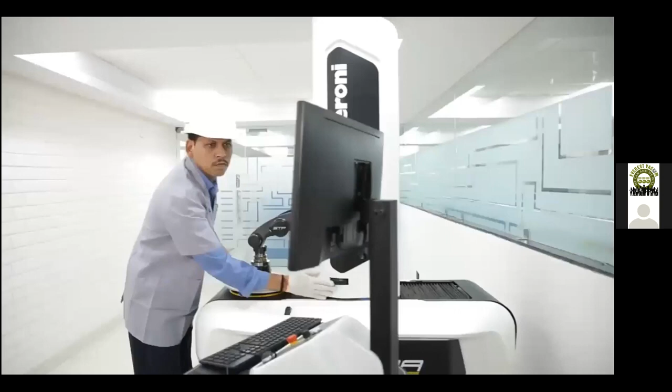We have a strong succession plan with highly competent second generation to carry on the mantle of Everest.

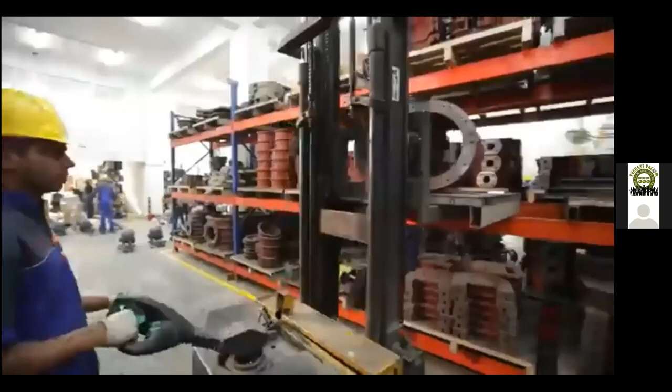In 1998, Everest Blowers Group went on to get its first ISO certification and also crossed international borders by exporting the products overseas. Over the years, Everest Blowers Group has made sure that it has abided by all industry norms.

Through various certifications, the Everest Blowers Group has been associated with many different industrial giants from different verticals, bagging prestigious orders from them. Innovative thinking and approach has made the company excel in many first-time achievements.

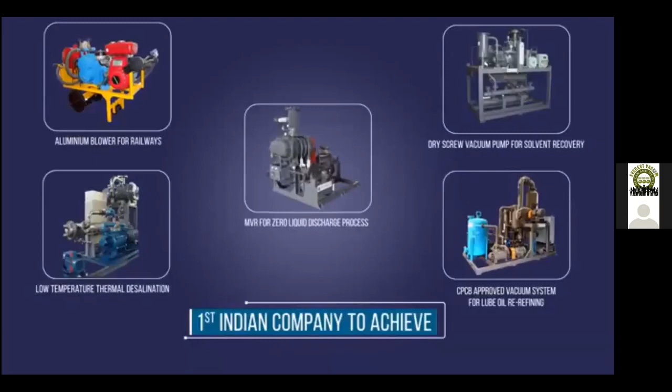Everest installed their first CNC machine in mid-2000s and since then has increased number of equipments to cater to the growing demand of the market.

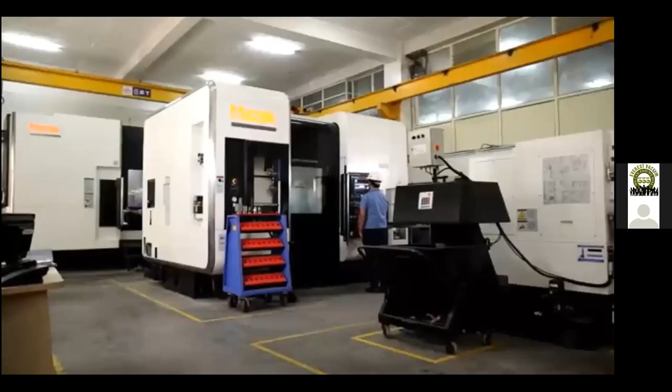Everest started manufacturing their range of tri-lobe blowers as a more efficient alternative for reduction in noise and vibrations. The group has received accolades and admirations in the recent years, touching the sky.

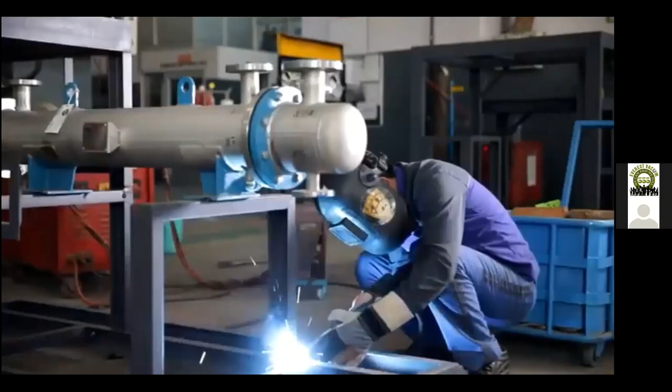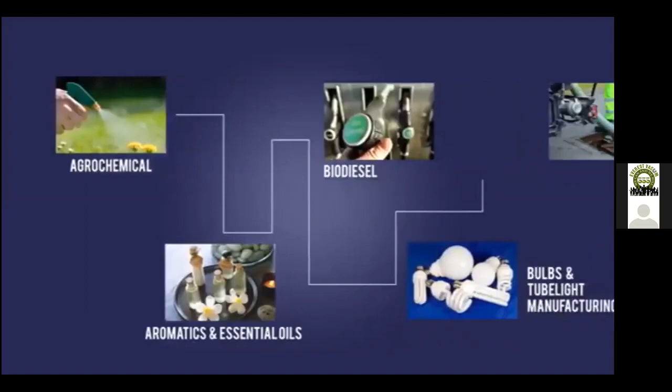The vacuum systems facility also started a dedicated unit to cater to the needs of complete skid-mounted systems requirements of our customers. The vacuum division is currently manufacturing around 350 to 400 complete skid-mounted vacuum systems annually, with a very wide industrial base spread across various applications.

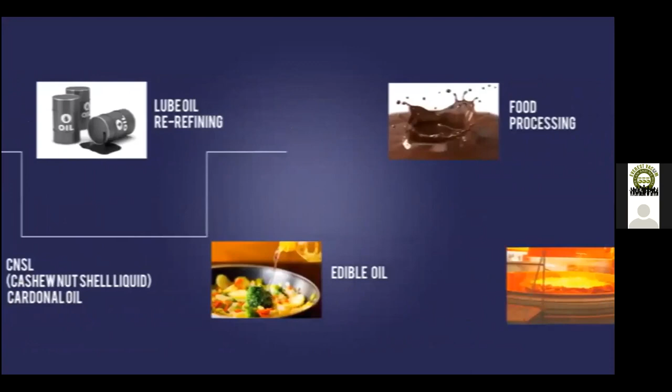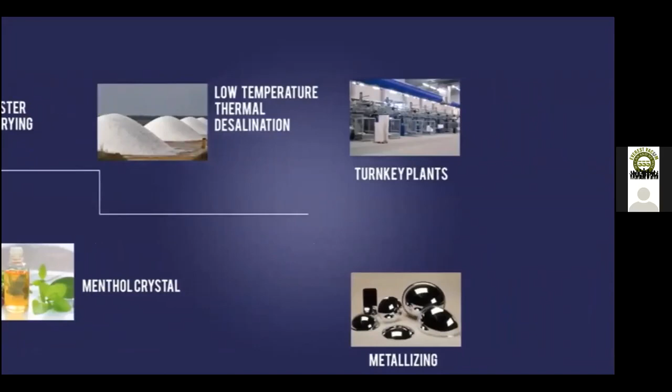The Everest Blowers Group is proud of its journey in scaling new heights and is in the pursuit of excellence. We are following latest industrial practices of Kaizen, 5S, and other lean manufacturing techniques.

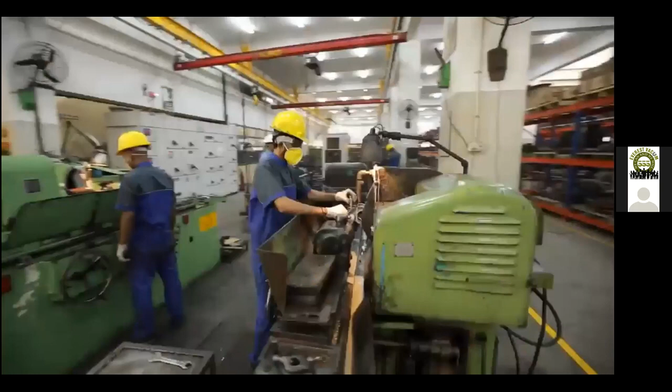To always remain connected with our stakeholders, we are available on all the leading digital platforms and have an online complaint portal, technical manuals, and a vacuum calculator.

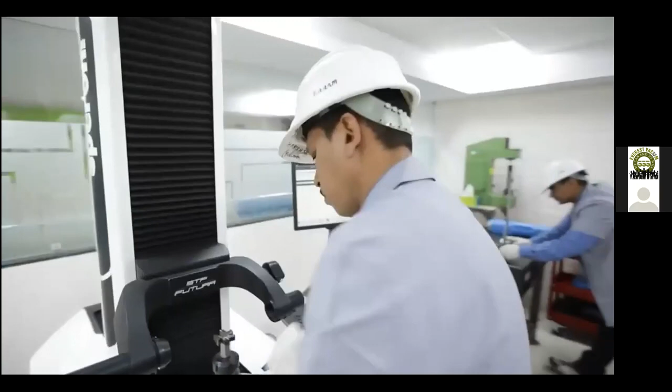It's been a little over 8 years since I've joined our family business, and we've experienced good growth with some diversification. I really enjoy what I do, as every day is a new learning of something interesting helping us serve our customers better. So at Everest, we believe in very strong fundamentals of quality and innovation.

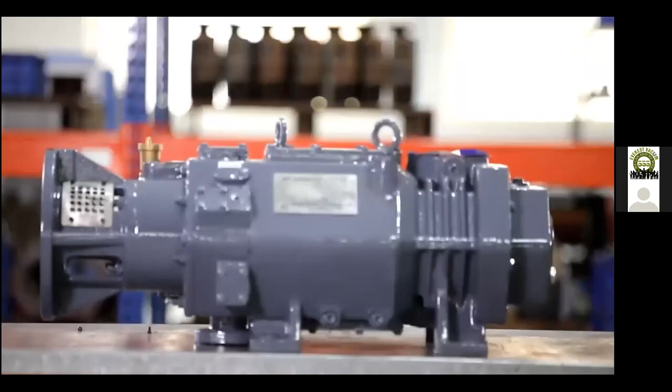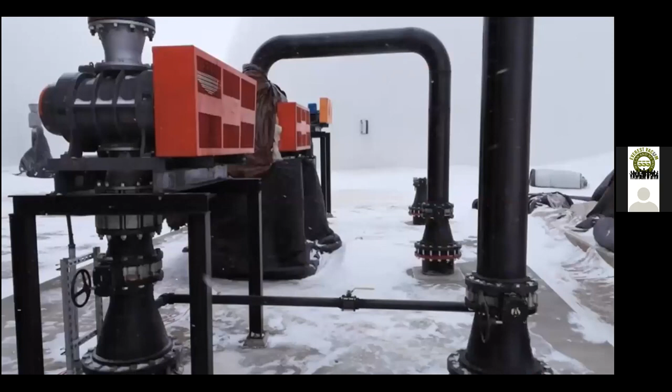We are the first and only company in India to have manufactured dry screw vacuum pumps, mechanical vapor recompressors, amongst many other products. With presence in the Indian market for over 3 decades and more than 150,000 equipments successfully installed, running in 38 countries worldwide, we are a trusted brand.

Our vision is to further build and sustain a positive relationship with our customers, to have an innovative and motivated work environment, and to ensure a bright future for all our stakeholders.

The Everest Blowers Group, standing tall like Mount Everest, reaching for the sky, now and forever.

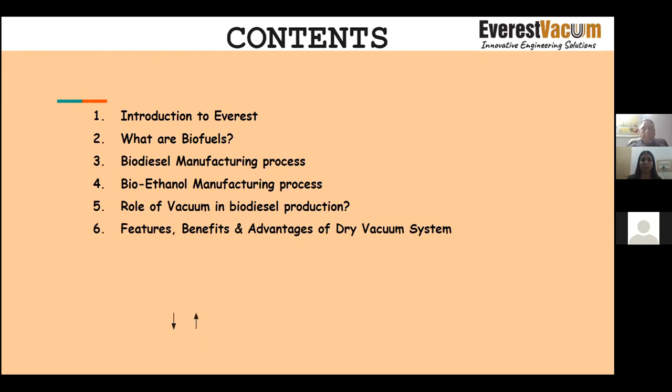Moving forward, we will explain you the most important thing, which is the role—what is the role of vacuum in biodiesel production? Then we will explain you about the benefits, features, and advantages of our dry vacuum pump systems.

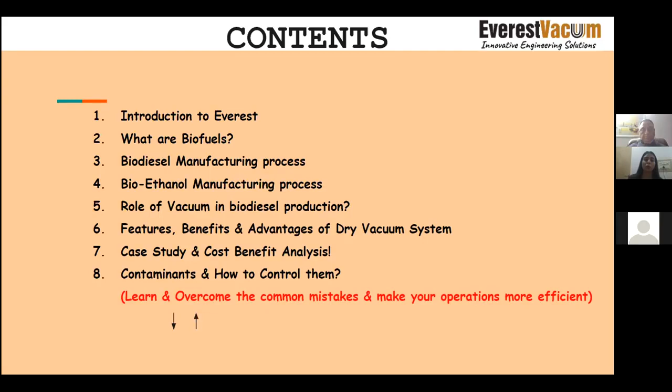All of this information we will explain with one of our case studies and the cost benefit analysis. Then we will explain about the contaminations and how we can control it. Moving forward, we will explain about the rule of 2030 as we explained in our previous webinar also.

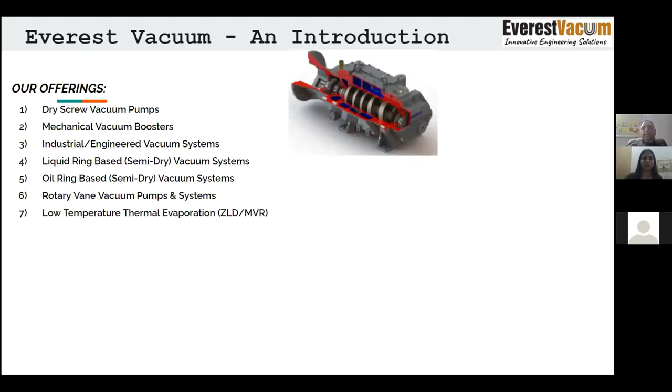Let me also introduce to you what we offer: dry screw vacuum pumps, mechanical vacuum boosters, industrial engineered vacuum systems, liquid ring based systems also called semi-dry vacuum systems, oil ring based systems similarly called semi-dry vacuum systems, rotary vane vacuum pumps and systems, and zero liquid discharge or low temperature thermal evaporation.

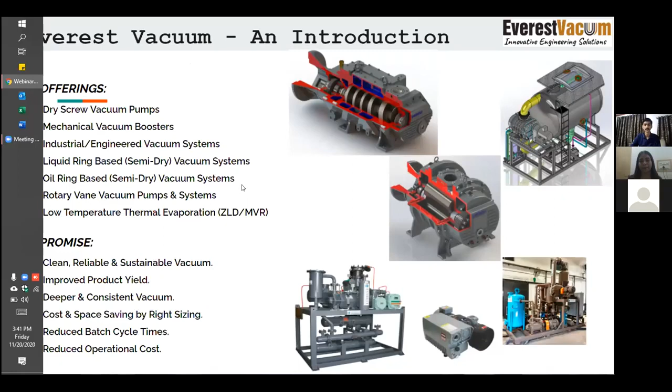Thank you, Chetna, and good afternoon to everyone. So what are biofuels? Biofuels are any fuels which are derived from natural sources, biomass. These are renewable sources of energy. Why do we say renewable sources of energy? Because these can replenish themselves over the course of time.

Why do we need to talk about biofuels? As we know, the energy requirements are continuously rising, but the supply of conventional fossil fuels is limited. Therefore, we need to look at alternative sources, and biofuels as alternative fuel sources are giving us very promising results. Biofuels are well-engineered fuels, which are also gaining popularity due to the rising cost of fossil fuels. The most common biofuels are bioethanol and biodiesel.

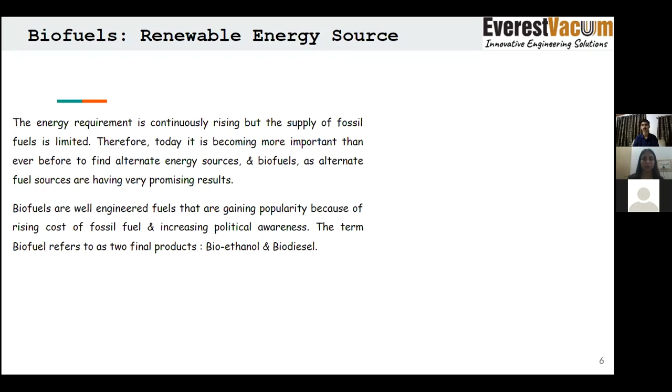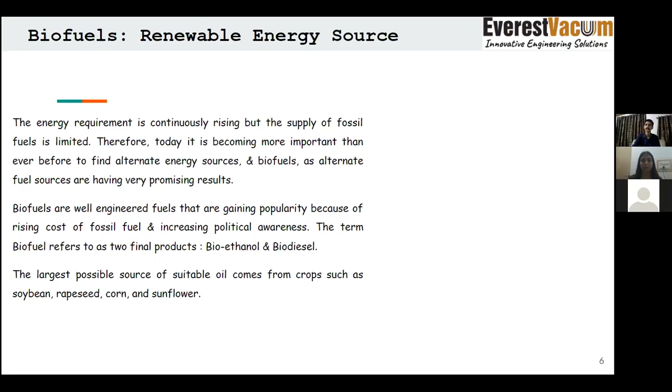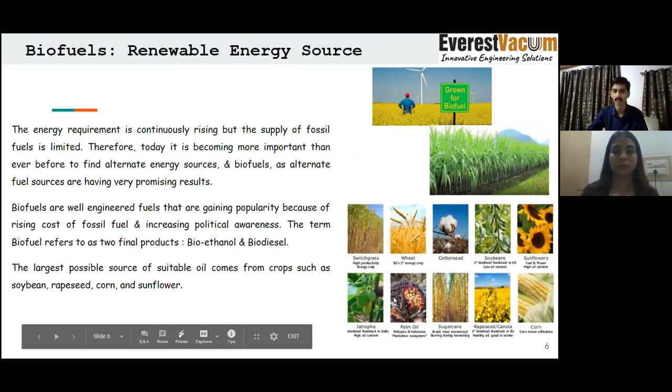While biodiesel is manufactured by transesterification, bioethanol is manufactured by fermentation. The largest possible source of suitable oil comes from crops like soybean, rapeseed oil, corn, and sunflower. Here are some pictures depicting the sources of biomass. As we can see, wheat, jatropha, palm oil, and other crops are displayed here.

The suitable feedstock which we can use to manufacture biofuels can be classified into 4 generations. In the first generation, we have food biomass, such as starch and sugar-rich crops. Second generation comprises non-edible feedstock, generally agriculture and forestry waste. The third generation is the integration of marine algae, whereas the fourth generation are genetically engineered crops.

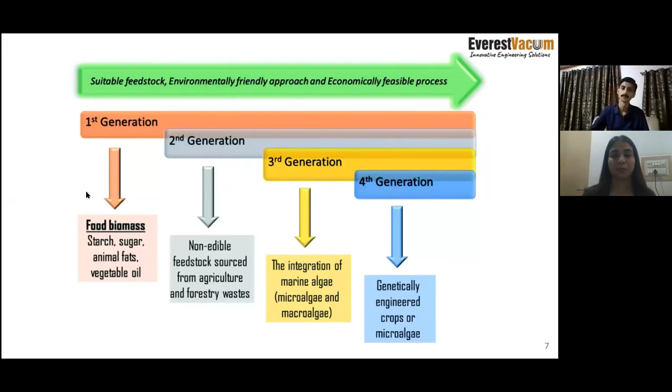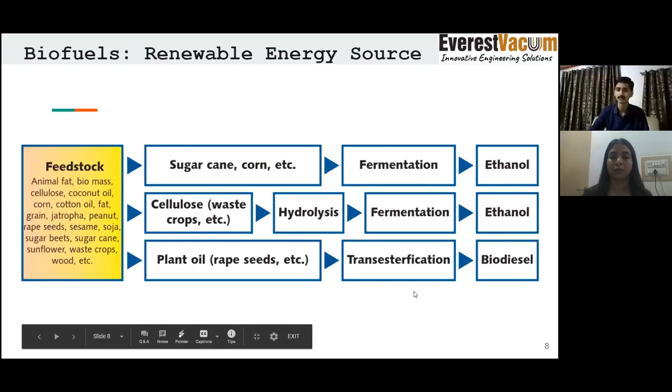As we can see, the feedstock, which may be animal fat, biomass, or any other oil or crop, can be processed either via fermentation or transesterification to give us ethanol and biodiesel. Let's start with biodiesel production. Biodiesel is produced by the process of transesterification.

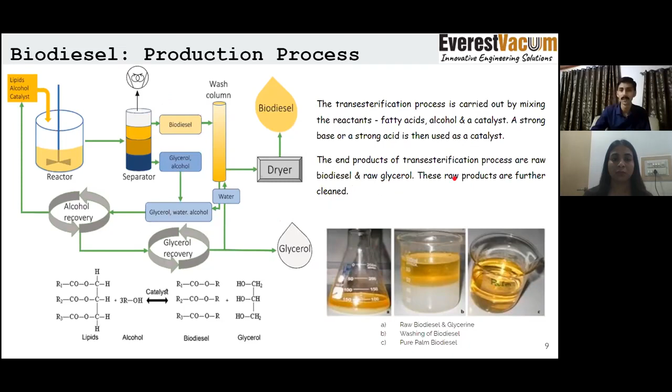Here we are depicting that the vacuum systems are connected to the separator where we need to separate biodiesel and glycerol. In this process of transesterification, we can see that for any plant oil, methanol is the most commonly used alcohol in the industry. And since we are transestering methanol with the oil, the product which we receive is methyl ester.

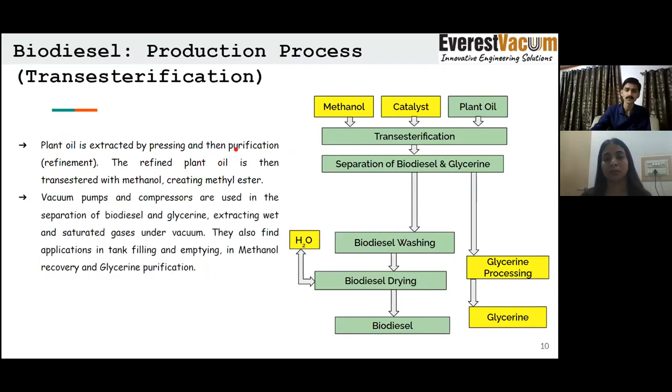Vacuum pumps and compressors, which we mentioned, are used in the separation of biodiesel and glycerine at this stage and extracting wet and saturated gases during this stage, in methanol recovery, glycerine purification, and many other applications.

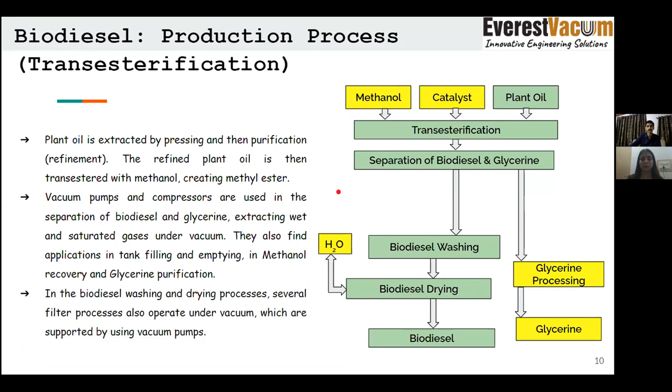If we take a typical example, we have 1000 kg of oil, which is put into methanol, sodium methanolate. What we receive out of the reaction is 1000 kg of fatty acid methyl ester, some glycerine, and free fatty acids with roughly 1 to 2% of moisture content.

This is generally a batch operation where the temperature ranges from 70 degrees to 250 degrees and the working vacuum is in the range of 100 torr to 0.5 torr.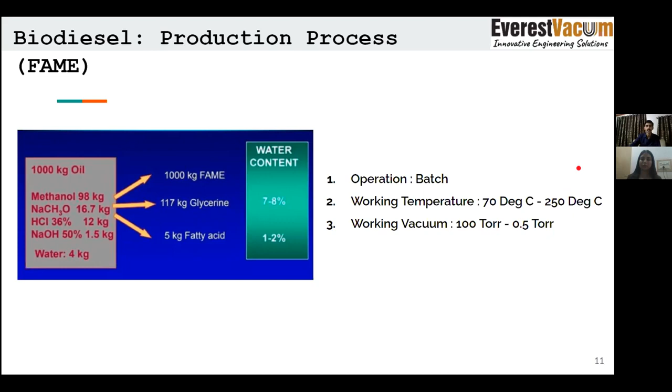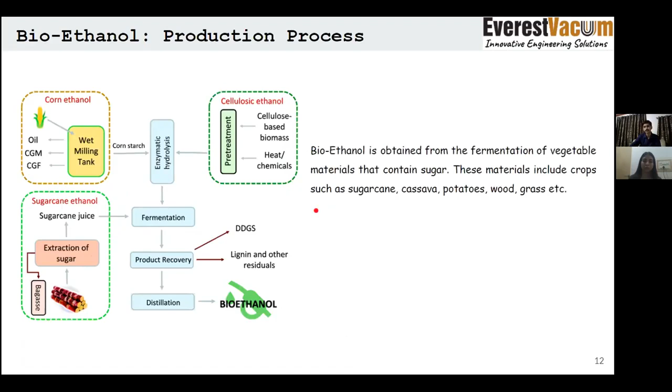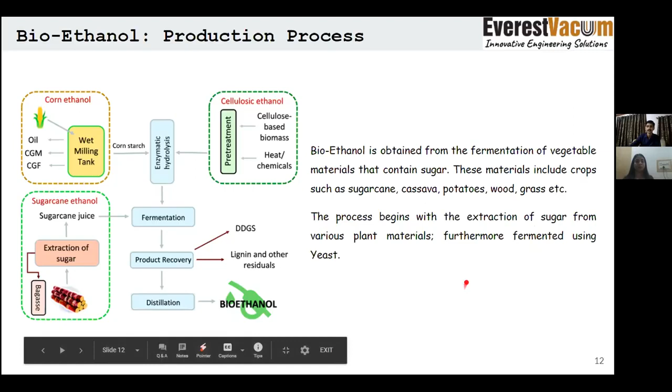Bioethanol is obtained from the fermentation of vegetable materials. Some crops could be sugarcane, potatoes, wood, and grass. In the fermentation process, these biological materials are transformed into other substances by adding enzymes.

Once we are through this fermentation process, our raw material, which is sugar, breaks into ethanol by liberating carbon dioxide. Now, before this distillation, the ethanol which we receive is 7 to 10% pure.

We can distill the ethanol to get up to 70% purity. By further distillation and reflux techniques, we can improve the purity to 95%. And at that stage, when we adopt alcohol dewatering technique, we receive bioethanol, which is 99.5% pure and also known as fuel grade ethanol.

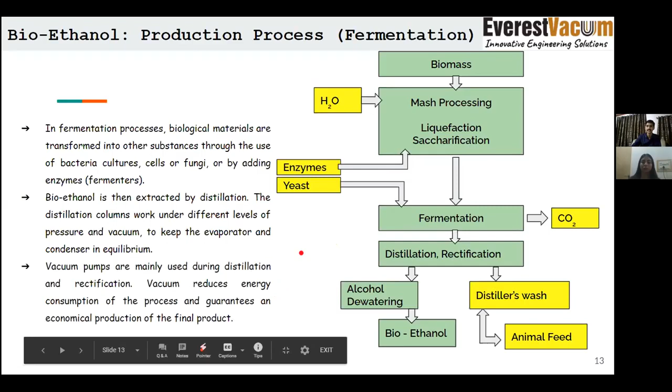Vacuum pumps are used during the distillation and rectification and reduce the energy consumption of the process, guaranteeing an economical production of the final product. This is a cycle.

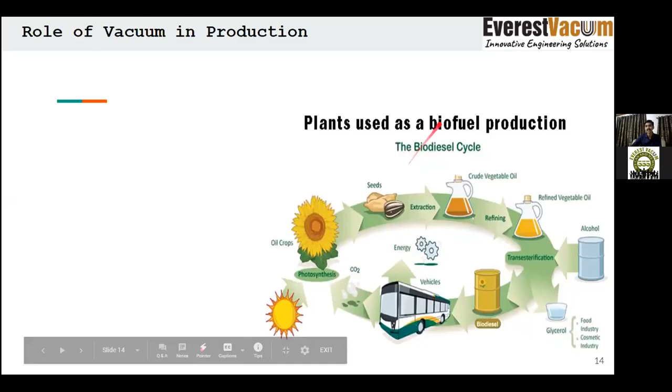These were earlier done either by using conventional systems or using wet vacuum systems, none of which can offer the same efficiency as using dry vacuum systems. Therefore, dry vacuum packages from Everest, which offer efficiently high vacuum, are rugged to process variations, also capable of handling process vapor and liquid carryover, making them the ideal choice because of their reliability in producing consistent vacuum.

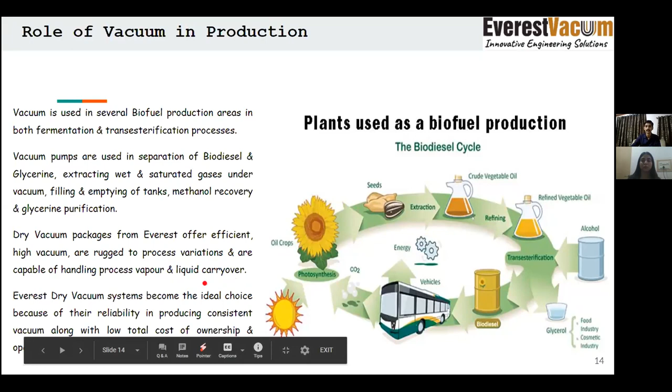This is a typical process setup for biodiesel production. If we can see, we have connected a vacuum system in the separator stage where we are separating biodiesel and glycerine, and further the vacuum system is connected during the stage of removal of free fatty acids and moisture. This is a typical vacuum system supplied by Everest.

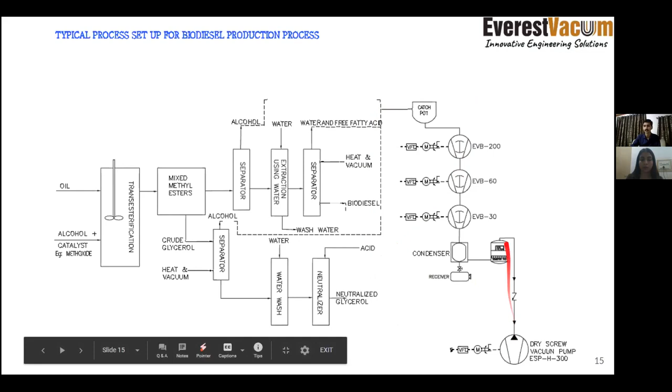Screw vacuum pumps, which are a flagship product, and we, being the first and only Indian company to have manufactured these in-house, these screw pumps operate using two counter-rotating screws. These rotors rotate in opposite directions and trap the gases in between the voids which are formed. These voids keep on decreasing, which not only compresses the gas, but also moves it towards the exit.

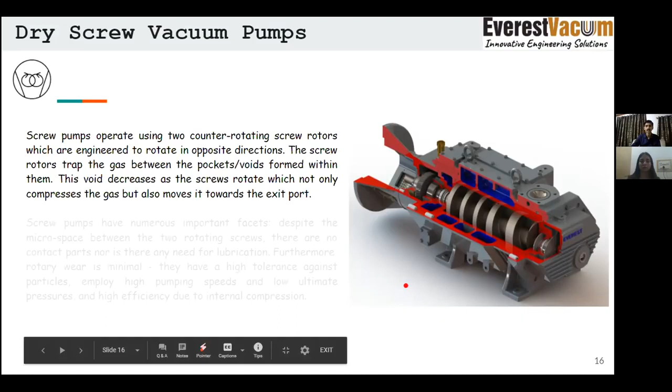Since the screw pumps have numerous facets, there are very micro spaces between the rotating screws, but still there is no requirement for any lubrication, and therefore we call it dry screw vacuum pumps. They have a high tolerance against particles and low ultimate pressures, highly efficient for internal compression, and very low maintenance and operational cost.

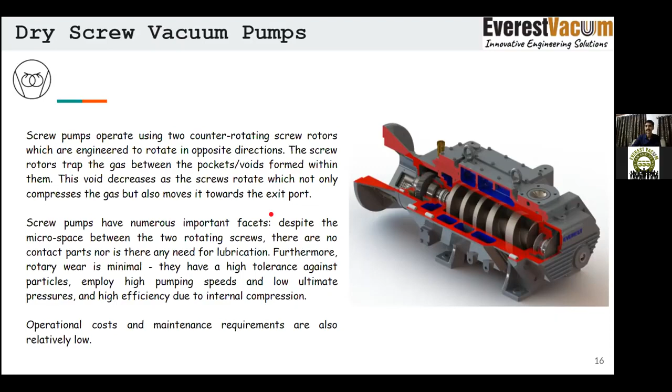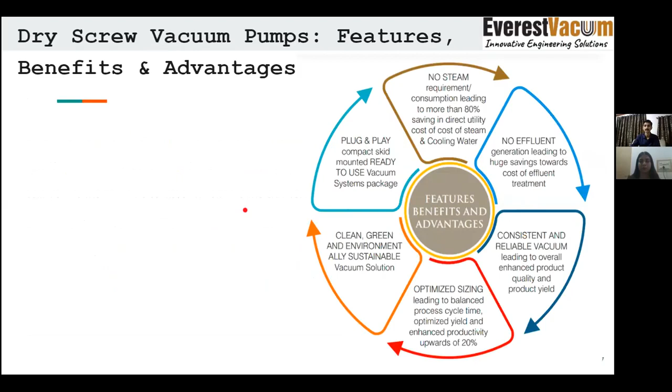Some features and advantages are there's no steam requirement, which makes a system dry and also helps in cutting down the effluent generation and effluent treatment cost. The vacuum achieved is consistent and reliable. Our systems are compact, skid-mounted plug-and-play units. We ensure very high pumping speeds, robust design, low maintenance cost, high volumetric efficiency, and 100% dry pumping.

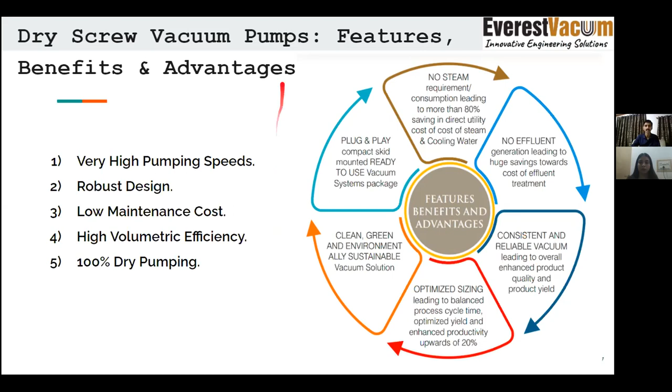We'll start with a case study where we have replaced steam ejectors with our mechanical vacuum system. The case is the replacement of a 4-stage steam jet ejector where a water ring pump was used as a backup. We supplied a 100% dry pumping SuperVac 10,400, with 3 stages of mechanical vacuum booster and a dry screw vacuum pump at the back end.

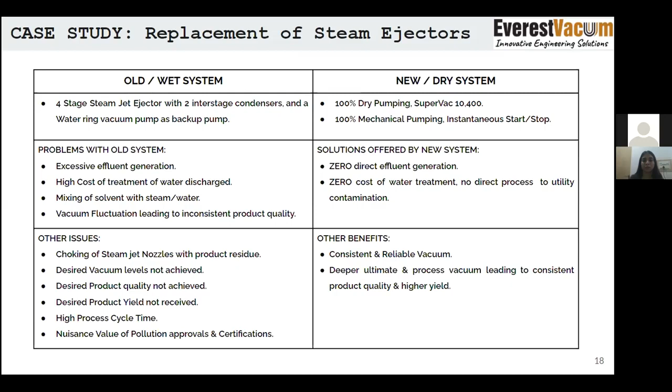There were problems of excessive effluent generation, high cost of treatment, mixing of solvent, and vacuum fluctuation. Employing a dry screw vacuum system, we achieved zero effluent generation, no cost of water treatment, and no utility contamination. We also gave consistent and reliable vacuum, leading to consistent product quality with higher yield.

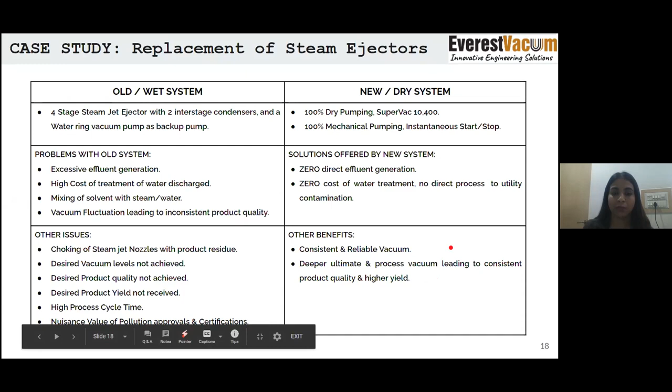There was an interesting discovery during this case. When we installed the dry screw vacuum system, we found some choking in the screw pumps due to product carryovers. On investigation, it was identified as the free fatty acid which we were removing. This fatty acid was getting mixed and choking the pump.

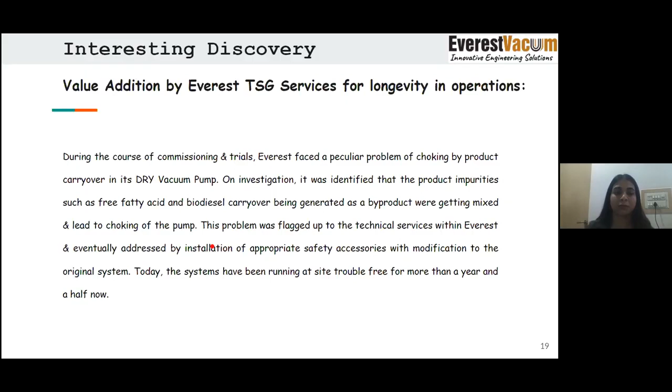This is when Everest Technical Services came into the picture, and we addressed this problem by installation of safety accessories. Today, these systems are running at site trouble-free for more than a year.

What did we do here? We installed an interstage condenser along with a proprietary vacuum trap so that we could arrest most of the incoming vapors, and 95% of those were condensed.

We'll talk about the cost-benefit analysis of this project, where our client is Matrix Fine Sciences Private Limited. Some process details: the products are alpha tocopherol and biodiesel. The process is distillation under vacuum, where we supplied a 10,400 meter cube per hour dry screw vacuum system, vacuum boosters with a dry screw vacuum pump, replacing the 4-stage steam jet ejector.

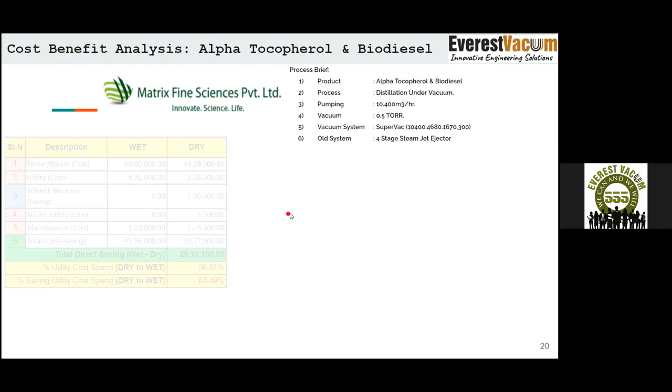As we can see in the cost comparison, their consumption of steam was 36 lakhs for the entire year, whereas the power consumption in our dry vacuum systems is only 14,28,000. The utility cost was 8,76,000, which came down to just 1 lakh rupees. The usage of an interstage condenser, which led to some solvent recovery, is saving almost 3 lakh rupees per annum.

The maintenance cost slightly increased, but overall, there's a direct cost saving of 29 lakhs over a period of 1 year. Apart from this, the 18 hours batch came down to 16 hours per batch, and the product quality also improved.

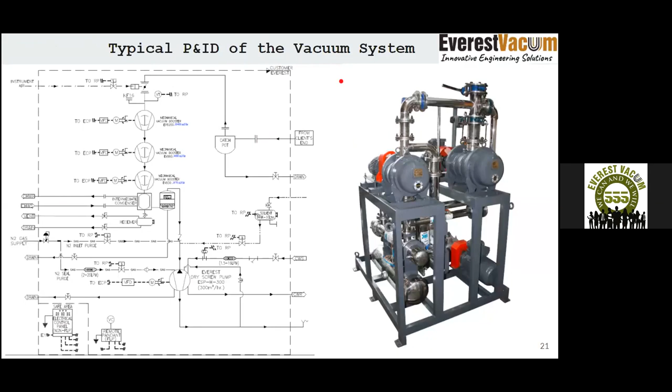This is a typical P&ID of our vacuum system. What we are supplying here, our vacuum system is connected from the client system. There are 3 stages of mechanical vacuum boosters, our intermediate condenser, a proprietary vacuum trap, followed by a dry screw vacuum system.

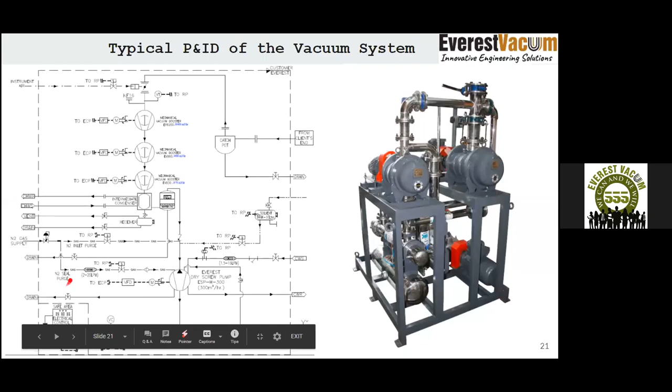Along with this, we provide an electrical control panel which houses the VFDs for all the machines and a PLC to control the entire system. We have a vacuum transmitter installed with a vacuum controller so that we can set the points we want to operate vacuum at.

There's a safety feature for solvent flushing to flush out all the condensable gases at the end of the process cycle, along with continuous purging of nitrogen or instrument air.

And this is the interstage condenser where we can recover most of the incoming vapors. A pictorial view, if we say, here's a dry screw vacuum pump with 2 boosters and an intermediate condenser.

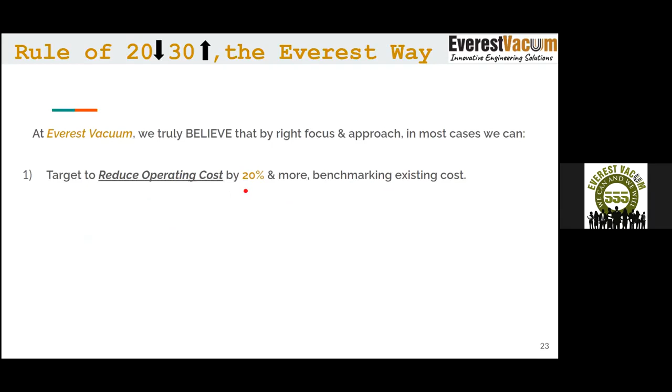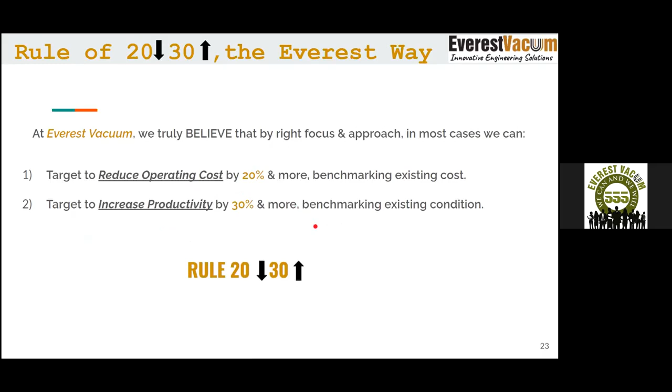We have a rule of 20-30 at Everest, where we believe by right focus and approach, in most cases we can reduce the operating cost by 20% and target to increase productivity by more than 30%, benchmarking the existing conditions if we replace and select correct vacuum systems.

Now we would like to talk about how to control the contaminants and improve pump performance. The process vapors and condensation inside the pumps can create a great nuisance value. We have two options to avoid these instances. The first is gas ballasting or dilution techniques, where we can purge instrument air or nitrogen in the system.

Instrument air can be used in any normal process, but if the gases which we are transferring are flammable, nitrogen needs to be used.

Another popular approach is hot pumping, where we can run the pump hot. We use a thermostatic control valve to regulate the temperature of the pump jacket, maintaining it at a certain level so that the vapors do not condense inside the pump.

The next problem might be dust and particulates, which can be a byproduct of a wide range of processes. To prevent particulate matter from entering the vacuum system, Everest provides inlet filters suitably designed as per your process so that there's no contamination inside the pump.

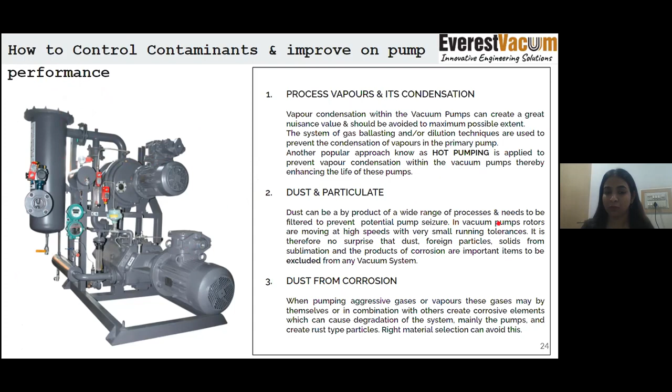At Everest, we have 7 golden rules for vacuum pump maintenance. First and foremost, reading the operation and maintenance manual and following the preventive checkups as per SOPs. Rule 2 is following the warm-up cycle. Rule 3 is never to block the outlet of the pump.

The discharge line should always be free from any blockages. Rule 4 is to install an inlet cold trap so that most of the corrosive vapors and contaminants can be trapped outside of the pump. Rule 5 is to use gas ballast, which we discussed while working with condensable vapors.

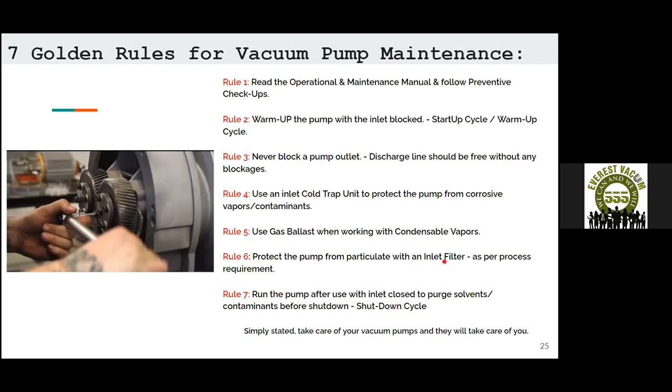Rule 6 is to protect the pump from particulates with an inlet filter. Rule 7 is to properly run the pump with a shutdown cycle and follow solvent flushing and purging. Simply stated, if we take care of our vacuum pumps, they'll take care of our process.

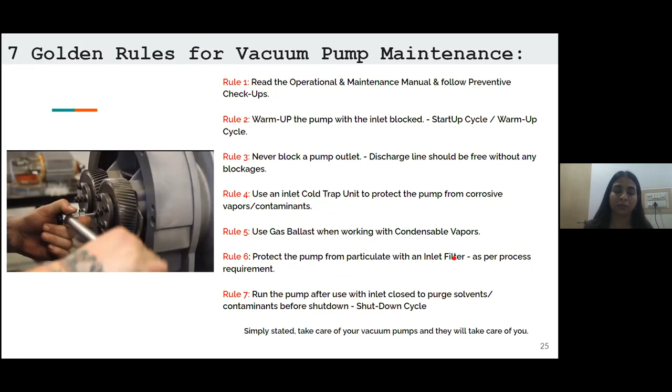As we mentioned, this is our 5th webinar. We have previously conducted 4 webinars where initially we talked about the basics of vacuum and the role of vacuum in industry. Then we talked about the selection of the right vacuum pumps for chemical and process industries. We had a webinar on operation and maintenance of dry screw vacuum pumps, and most recently, we organized a webinar on the operation and maintenance of mechanical vacuum boosters.

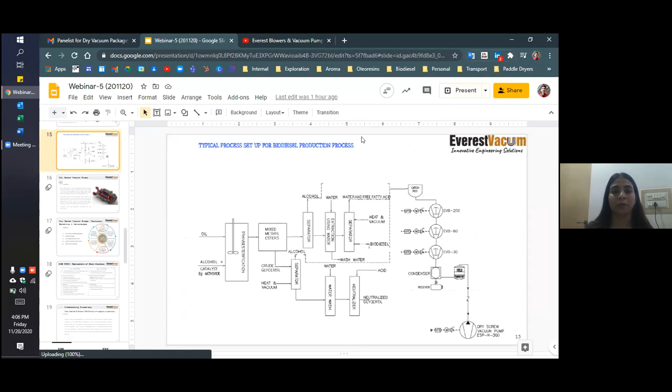I'll add to this. You see, at Everest, our objective is to provide and design a robust vacuum system. There can be multiple applications for which a system can be used, but the end objective of any vacuum system, for that matter, is to remove non-condensables. All condensables typically should be removed by an efficiently designed condenser. Now, whether it be separation, distillation, or recovery, all are done under vacuum. The main reason for doing it under vacuum is to get more energy efficiency and to prevent hydrocarbon cracking.

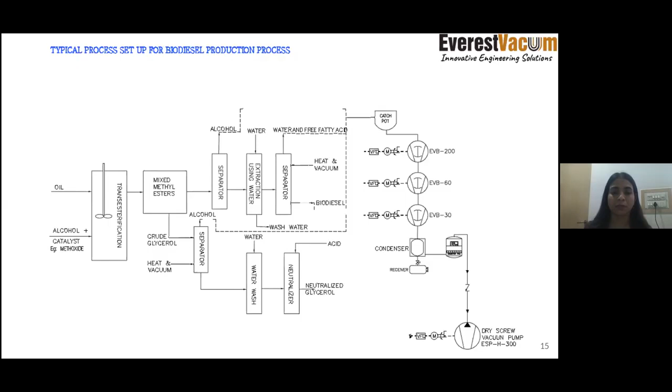For this objective, a vacuum system works out to be a very efficient method. Distillation under vacuum, which in other terms may be called separation, is the preferred way to go about it. Would you like to add something to this, Priyanshu? No, sir.

Then we have another question from Mr. K.S. Rao, who says he's an expert in biodiesel production. He says that mechanical systems might be prone to high maintenance and breakdowns. However, steam jet ejectors have no moving parts and can consistently provide 1 torr vacuum. What is your response to this? Please elaborate.

I think I'll take the lead on answering this question for him. Good afternoon, Mr. Rao. I am Dhruv Malhotra, I am with the TSG group at Everest. Our job is to ensure that we overcome such challenges by working in very close association with experts like yourself.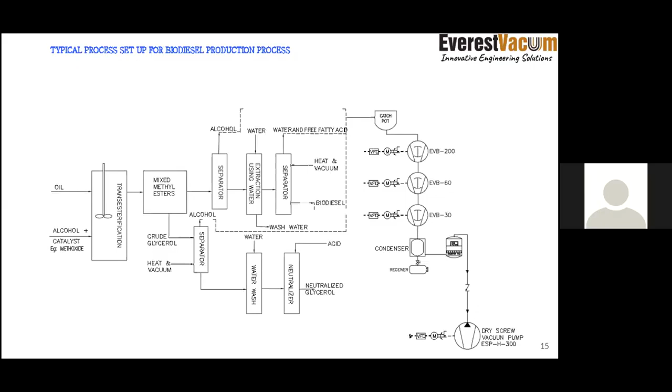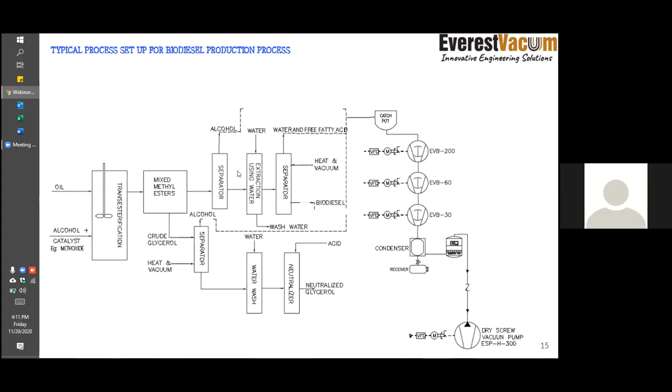We at Everest, like Priyanshu showed. Priyanshu, can you take us to the page where you showed an interesting discovery? Initially, when we supplied the system to this company manufacturing biodiesel, we faced issues of frequent pump choking. We were able to identify exactly what was the reason, and after identification we were able to eliminate the cause of the choking by installing proprietary traps in line before the vacuum pumps.

Mechanical boosters per se have no effect from process material coming into them, unless it is solid process material, which in most cases does not happen because the operating vacuum is 1 torr, and at that operating vacuum there is no medium to carry away solid particles. It is only process vapors that are being carried along.

So by using traps and efficiently designed filters and condensers, we are quite confident that we are able to eliminate any process carryover that would lead to pump failure.

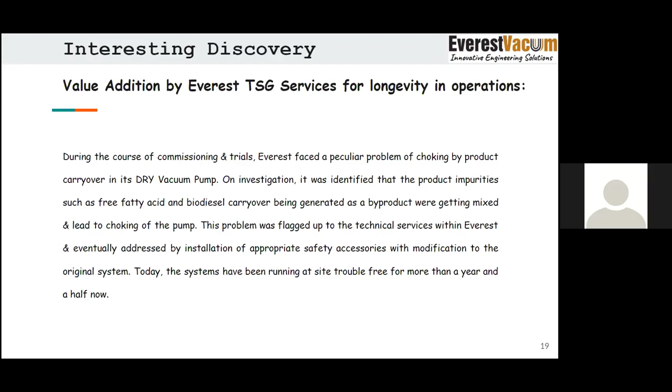Now, if you study this, the bigger the size of the system, the faster the payback. The cost you can recover through efficient dry pumping is a much bigger advantage than the maintenance downtime you might face from mechanical vacuum boosters. Biodiesel is a new upcoming line in India, but we have been using such systems very heavily in other processes such as edible oils, for deodorization of edible oils. The processes are all similar, it's just that the end product changes in various cases.

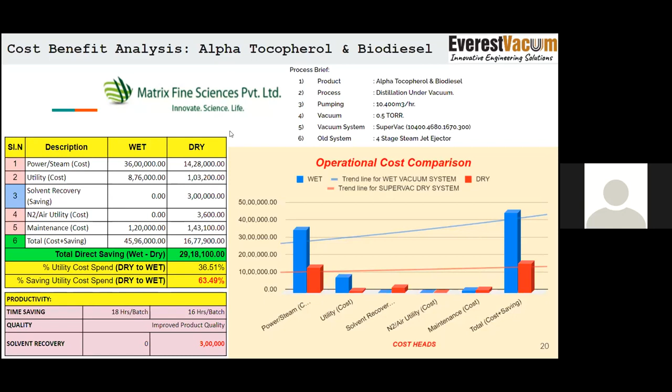Nishant, I believe there is one question from Mr. B.N. Reddy. He has a biodiesel question, that biodiesel is solidifying in cold weather. Any solution for this from our end? If it is solidifying in your kettle or in your process, I don't have a solution because that is beyond our reach. But in our vacuum system, we don't let it condense.

So what we do is something called hot pumping. How does hot pumping work, or what is the concept of hot pumping? Once the vapor reaches our vacuum system, our objective is not to allow vapor to condense within our vacuum system. If it condenses in the condenser, well and good, no problem. But within the pumps, it cannot or should not condense. If it condenses, it will lead to problems.

So that's why we introduced the concept of hot pumping. Here, what we typically do is, when these pumps are running, they are generating some heat of compression. Because of that heat of compression, they are getting hot. We circulate water in a jacket around the pump, very similar to what happens in a car engine.

You have a radiator and hot water being circulated to cool down the cylinders. A similar thing happens in the pumps. The same principle that works in cars, in winters, we regulate the temperature of the water in the pump using something called a thermostatic control valve. The objective of that valve is to maintain the flow rate of water such that the pump remains in a hot state and does not cool down below a particular temperature.

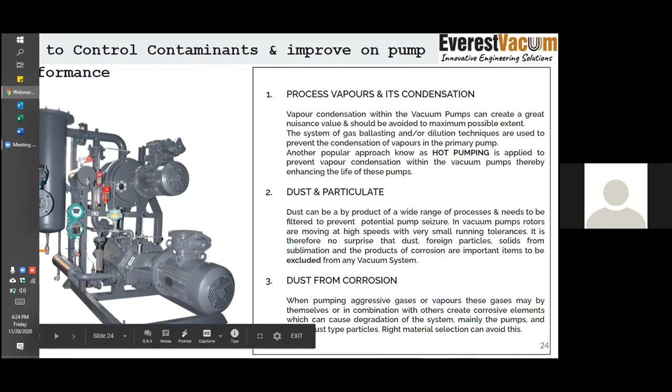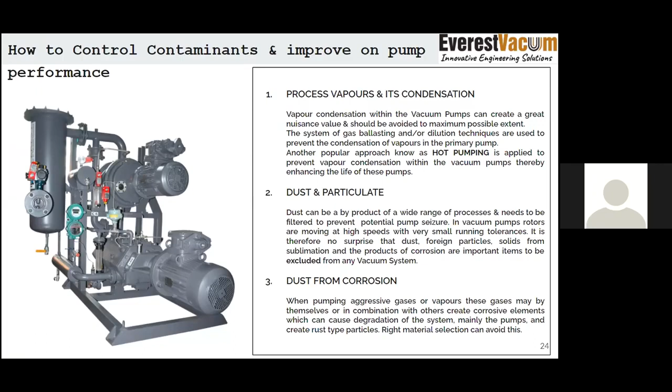I have got another question from Mr. Rao: is vacuum sealed in the system after power failure? Yes, of course, there are check valves in place. As soon as the power goes off, these mechanical check valves isolate and close the system.

Priyanshu, do we have any more questions? We have one question from Mr. Veeragandham Subbarao which I would like to answer. His question is: we use wood chips as fuel in our boiler to generate steam. If I want to replace the existing steam vacuum system with your dry system, what would be the operating cost?

Mr. Rao, as you are aware, steam generation cost falls between 90 paisa to 1 rupee in case of wood fired boilers. So even if you have a consumption of say 1000 kg per hour to maintain a vacuum of nearly 0.1 torr or 1 torr, the cost of operation will go to 1000 rupees per hour.

But as Priyanshu has depicted, in a system of say 10,000 meter cube per hour, we have connected power of 40 or 50 kilowatts based on customization. So if you check the unit cost at your end, say 8 or 10 rupees per kilowatt hour, the cost of operation comes to around 320 rupees per hour. So you save 70% of your current operating cost, and you can save a huge amount of money annually if you operate 24 by 365.

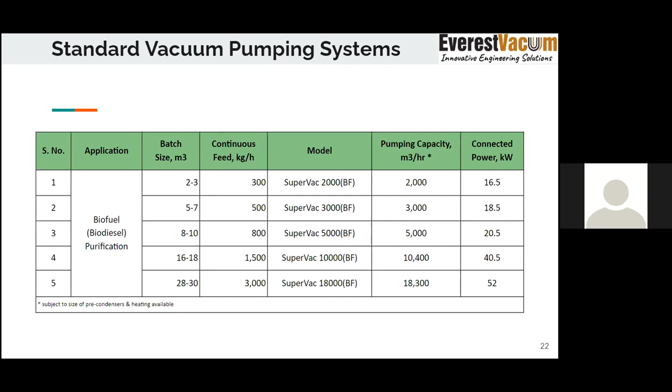Vacuum pumps can work under a very vast spectrum of temperature. You can have vacuum pumps operating at say 4 to 5, 7, 10 degrees also. We do that in freeze drying applications where the triple point of water is at 4 degrees, so we need to operate below 4 degrees.

The highest discharge gas temperature that we can allow the vacuum pump to pass through is 150 degrees in case of dry screw vacuum pumps. So the spectrum in which we are working is anywhere between 0 degrees to about 150 degrees discharge gas temperature.

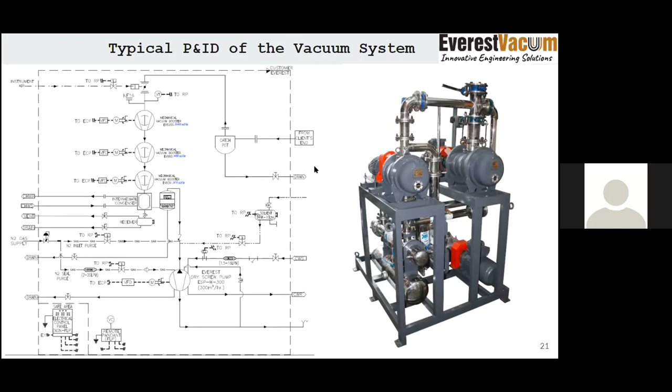Mr. Rao has one more question, sir: we can remove the FFA of vegetable or animal fat by molecular distillation with the usage of dry screw pumps. Please share if you have any case study data like feed FFA and product FFA.